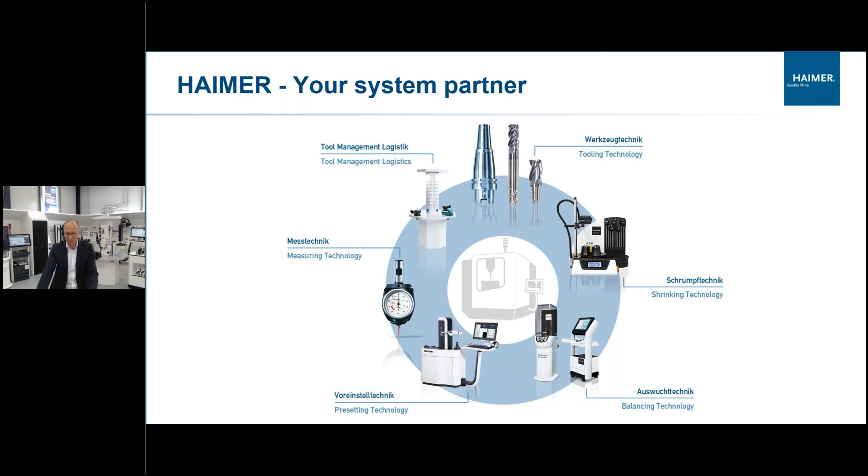So that's the Haimer program. Today I want to show you how productive machining can be realized with the help of the surrounding and the help of the Haimer products, to fulfill the highest productivity optimization in your production process.

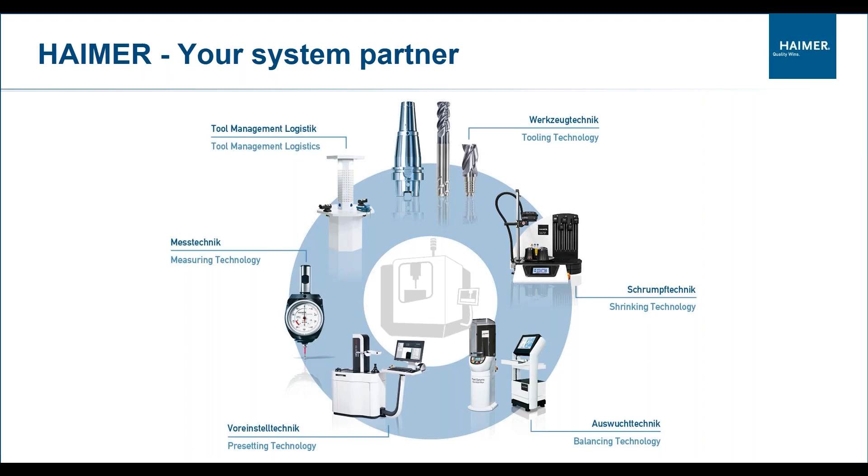Coming to the next slide, which shows why high quality tool holders are actually needed - what is the reason why we need high quality tool holders in the process of machining and cutting and making chips. We have a high quality and high precise machine tool with high quality and precise spindle and software, and then we have a very good cutting tool.

So we want to make chips. We want to be very precise with the part that we have to machine - that's the challenge we have to master. In the middle of this process we have a tool holder, and this tool holder is the interface, and it must reflect the quality and the accuracy of the machine tool and the cutting tool. So that's the challenge that we are facing.

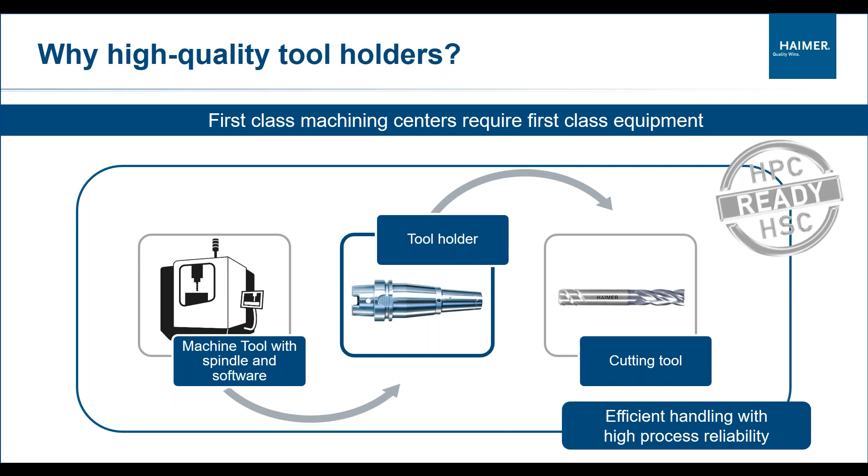We say first-class machining centers also require first-class equipment, which means also around the machine tool. For this reason, we say it's obligatory that you also have a high quality tool holder for the efficient process. But what does high quality tool holder mean?

First of all, the saving potential in manufacturing is enormous. But if you want to save on the tool holders or on the cutting tools, you save only 0.5% of the whole cost structure for your machining needs. We say if you really want to save money, then you save money on the machining time. You want to be more productive, more efficient, you want higher feeds and speeds. This is where you actually can make the money, and not by purchasing cheaper tool holding or cheaper tooling.

So it's about machining time, productivity on your machine. Use the time on your machine in a real productive manner. This is the message of this chart here.

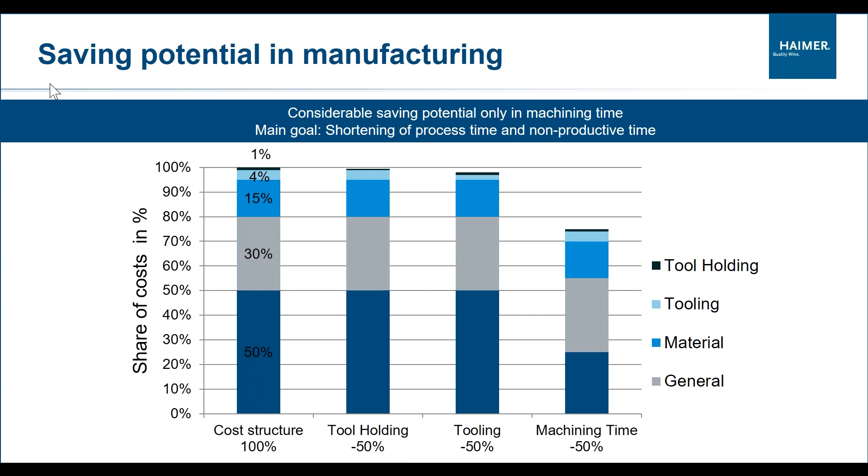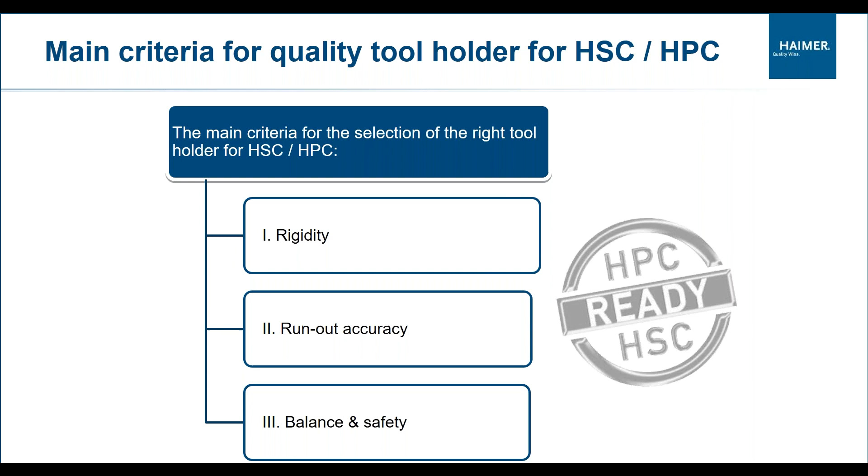Followed by the main criteria for a high quality tool holder, which means rigidity, runout accuracy, and balance and safety. In the following I come more and more to rigidity, which means the rigidity of the interface of the taper. Haimer grinds very precisely, especially there where the spindle takes the tool holder. We have fine ground parts and highest accuracy - less than 1 micron we are grinding - and this is what highest quality in machining needs looks like.

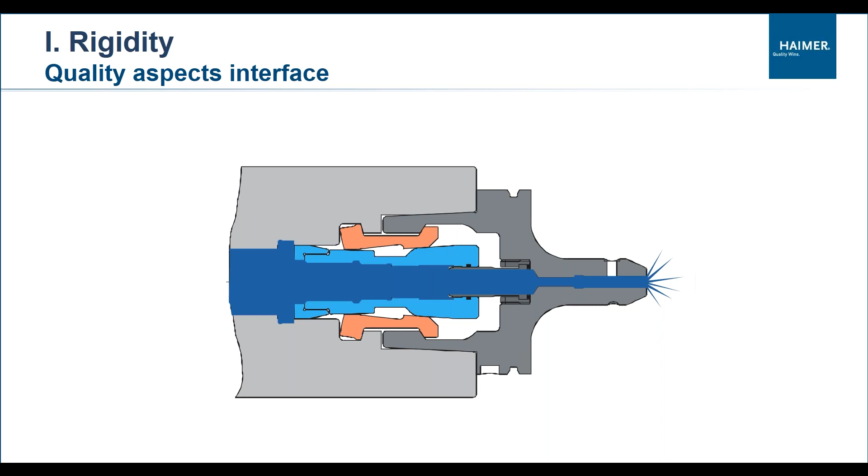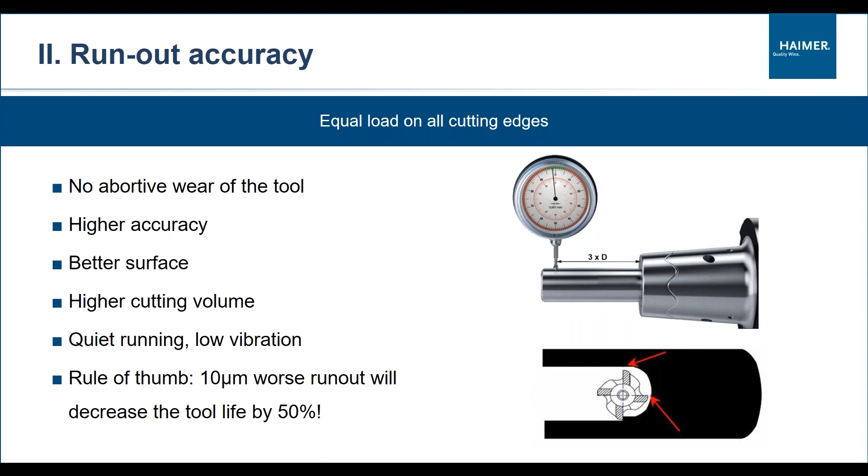So rigidity is one point, runout accuracy the second point. We want that you cut, of course, with all 4 cutting edges of your cutting tool, and not only with 2 cutting edges, which means higher runout, then you have higher cost for the cutting tools, and of course you will also have a workpiece which doesn't fulfill the quality aspects that you desire.

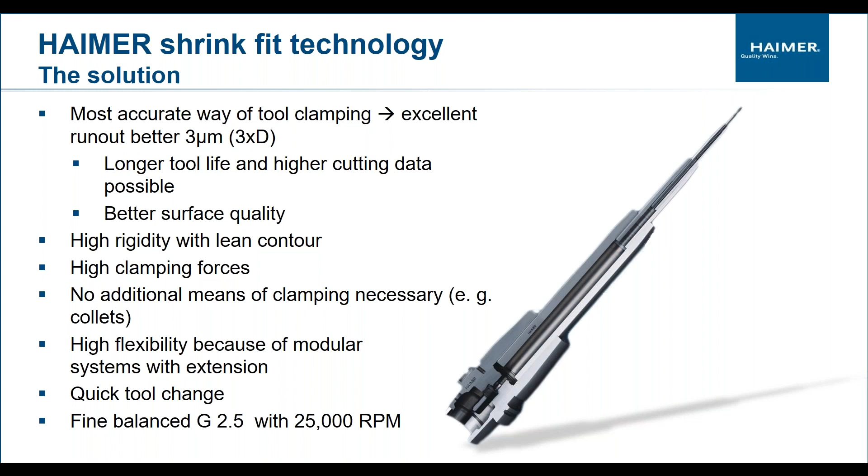Shrink fit technology is the solution to be very accurate and very flexible. Long tools can be realized. You can have shrink extensions to shrink them in, to reach deep inside, to get into cavities and around the part, especially for 5-axis machining or dynamic milling applications. This is a perfect system, and you are very flexible, with a high fine balanced G2.5, 25,000 RPM balancing quality with all the Haimer tool holders for shrinking technology. So that's really a super system.

Of course, for this system, you also need shrink machines. Haimer is the only one in the market that offers Industry 4.0 ready shrink machines that are tailor-made for the Haimer shrink holders. Of course, they also work with other shrink holders, but they're perfectly suitable for the Haimer shrink holders. The whole system guarantees highest run-out accuracy and long tool life for the tool holders, so you can shrink out and shrink in as long and as often as you like, just following the principle of this system.

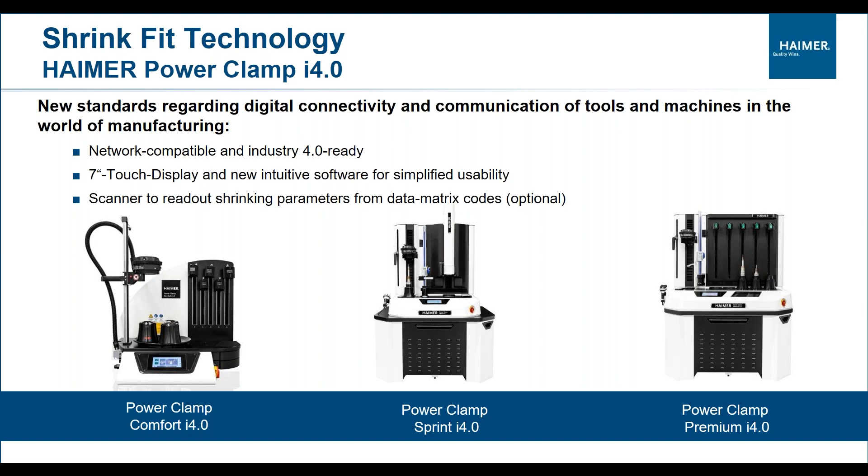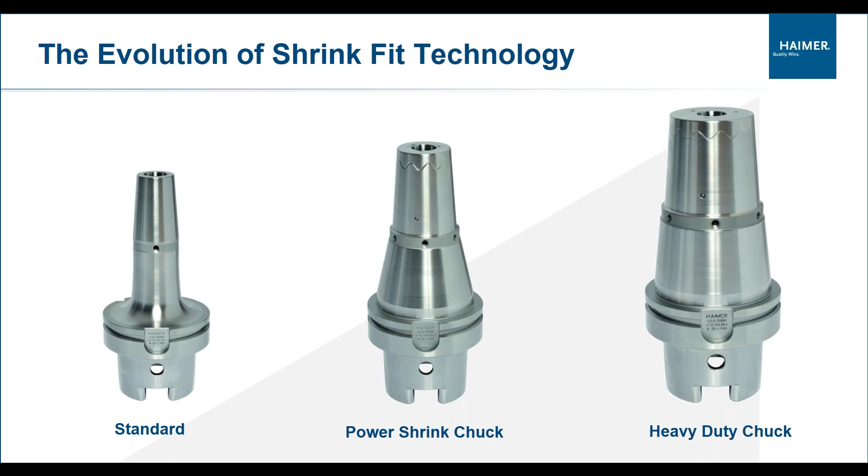Shrinking actually comes out of the die and mold area, but today it is also used in automotive and aerospace. So we have different geometries for shrinking holders: a standard holder, power holder, heavy duty holder, and power mini holder, different geometries to fulfill different applications and tasks in your machine tool.

The Haimer shrink holder is also a little bit different from the competition. We have a very short chamfer, which means a very long fit and very high clamping forces. We have a tight bore, so we have the best clamping forces. For this reason, cutting tools cannot get out of the Haimer holders. In case of really challenging applications, we also have our safe lock system.

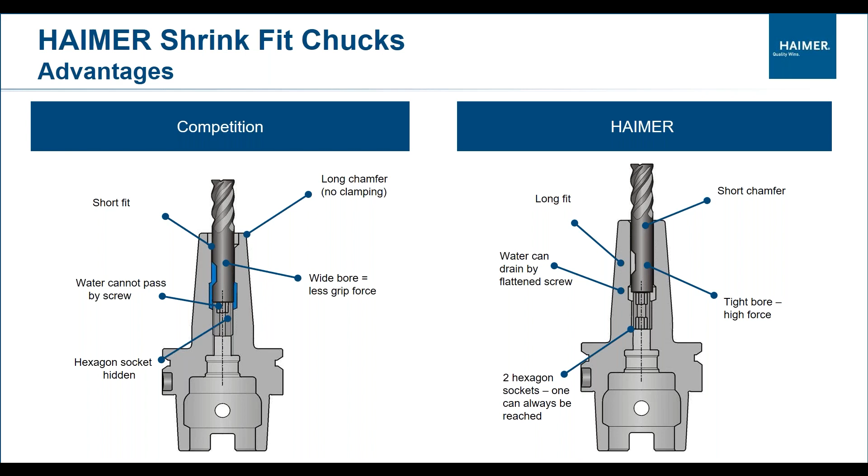Okay, then I have prepared the first demo for you. Let me see if I can just start it. It's a machining demo. I assume you can now see it. Let me see if I can just start it. Now it's starting, and I hope you can see the video now.

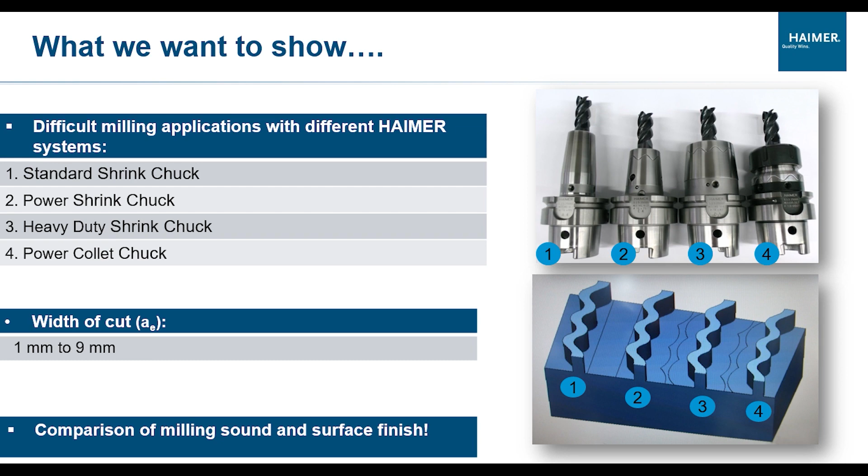One second, I'm sorry to interrupt. Can you see the video actually? Unfortunately not. Try to go to your screen drop-down list and see the video itself. So in sharing, is it now visible? It's loading. Can you see it now? Do you have it on your computer maybe, so we can try to play it? Is it now working? Unfortunately not. I'm sorry, okay, or what should we see? Give me a second, you should see a video actually. But what's the first? I see a test setup table. Is this from your slides or just a video? No, it's a test setup. Yeah, that's a video actually, so that's a test setup, so then you see it. Okay, so that's a test setup. Okay, it looks like the slides. So go on please. Yeah, it's a test setup.

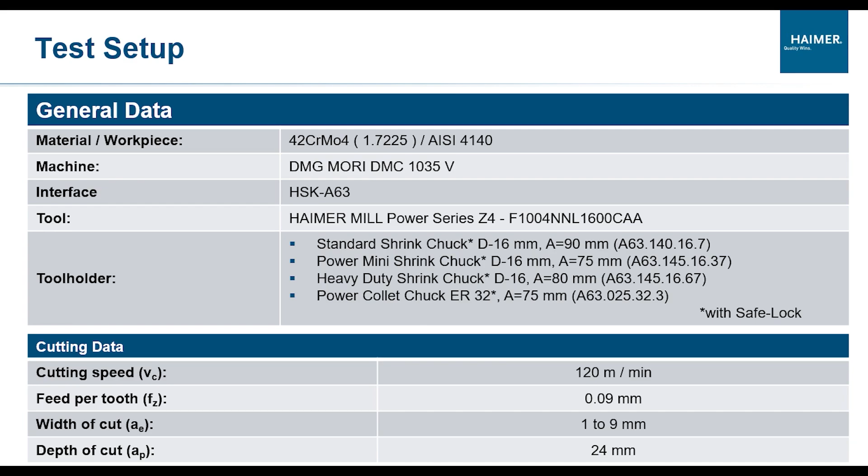Yes, and now you can see the machining. Please listen to the machining sound. So that's a standard shrink holder, and we want you to see and hear the sound of this machining process. Of course you would reduce feeds and speeds in this case. It's a standard shrink holder, a challenging application in 42CrMo4 material.

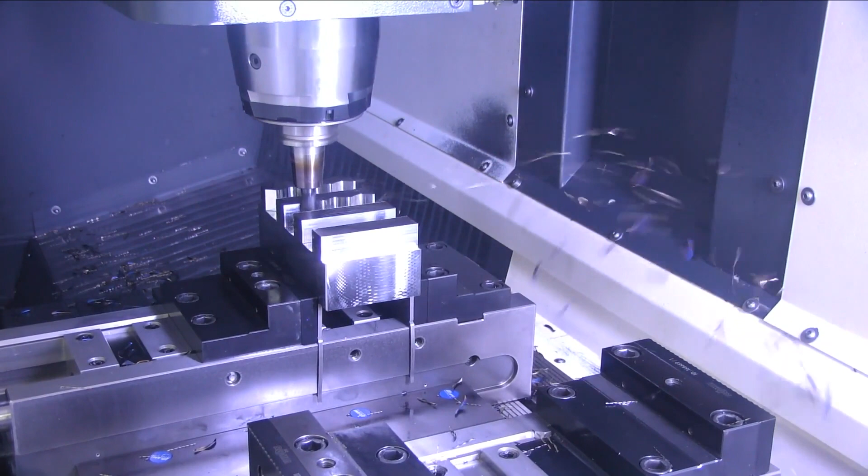And this was a standard holder. Now we are doing it with a power shrink holder, which is a little bit shorter and has a bit more outer geometry. Listen: a very smooth machining process, which means a stable process. You could maybe easily increase feeds and speeds for this. For this reason, it's a very stable machining process, just by the change of the tool holder — the cutting tool and everything else stays the same.

Then we have the Haimer heavy duty chuck, which is even more rigid. You can see it's a really stable shrinking holder, smooth cutting, smooth process, no noises, no vibrations, just a smooth cut.

So all of these are shrinking holders, but they fulfill different applications. Now we see a fourth one: it's a power collet holder, so it's a collet chuck — a stable system, very short, high quality, high run-out accuracy, also very stable. You hear the sound, it's also a very good sound, so no vibrations.

Okay, I hope you can see my screen again. Yes, we can see it. Perfect, and now we see the pictures and the results out of this test cut.

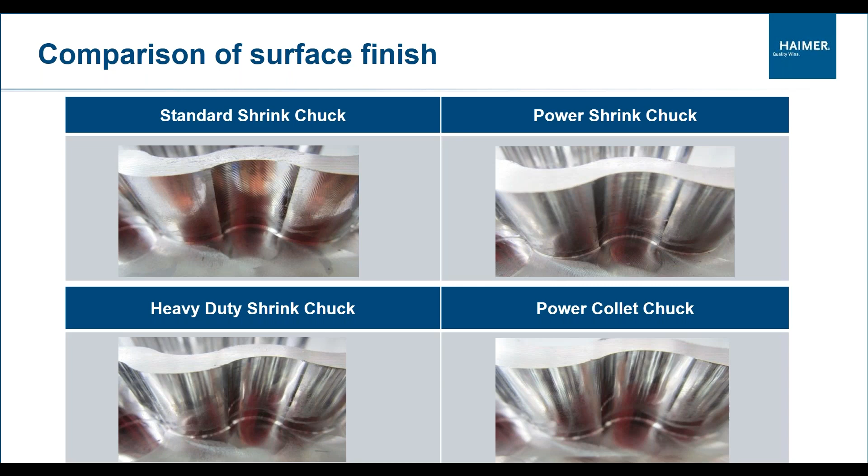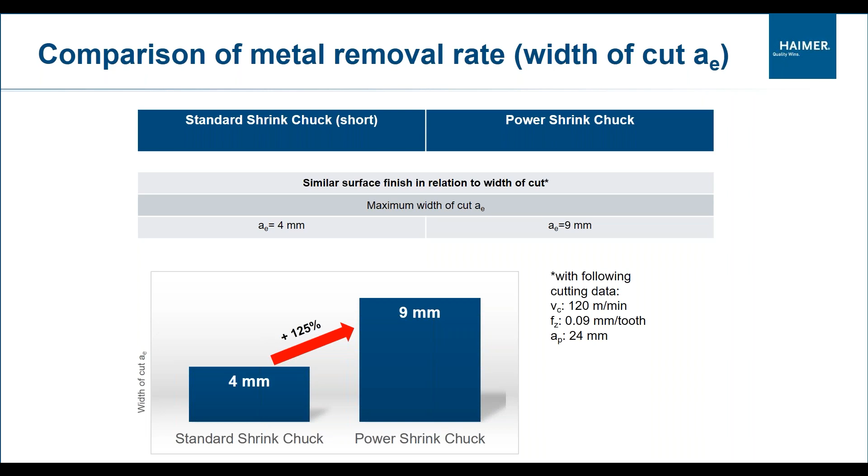You see the standard shrink chuck on the left side at the top, and then you see the surface finish is not as good as with the power shrink, heavy duty, or power collet chuck. You could hear it, there were vibrations. We just changed the tool holder, nothing else in the whole system, and we got a very different cutting and machining process just by changing the tool holder. So it's very easy. What we could realize in this case is higher productivity, because with a power holder you can have a much higher AE, meaning depth of cut or width of cut — we can go 9 millimeters wide instead of only 4, which is a 125% increase in productivity, which is actually the goal. We want to be productive.

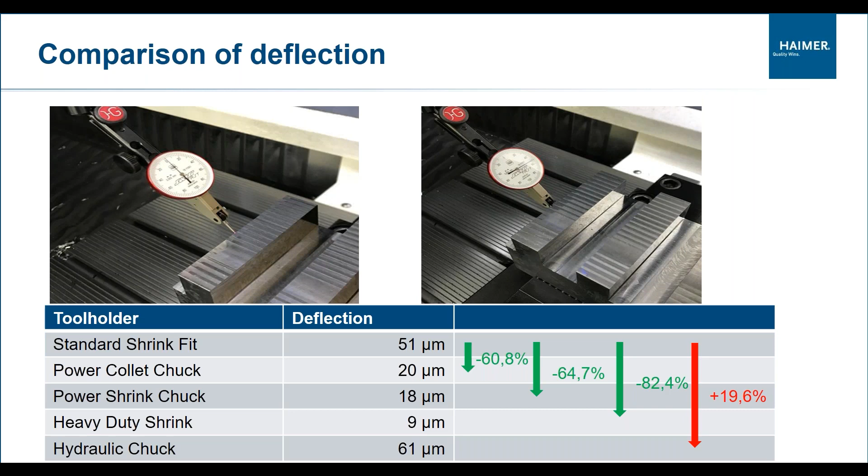We want to make chips. We want to earn money on the machine tool. And of course, the weaker the system, the more deflection we have. In this case, the standard shrink holder had more deflection than the heavy duty one. Also with a hydraulic chuck, which we didn't show now in the picture or movie, we checked it too, and we have even more deflection. So it's not a stable system, not as rigid as a shrink holder. That's just to show you different versions and geometries for shrinking holders.

Another very important fact is balance. What is balance? Unbalance is expensive even if you don't see it. Sometimes you have vibrations but don't know why, and it's just because your tooling package or cutting tool, including the tool holder, is not balanced, and it creates centrifugal forces at higher RPM. To be more productive, you can use balancing as a system to get more productivity out of your machine tool, to increase your RPM, or your feeds and speeds. With unbalanced tools you have reduction of tool life, reduction of spindle lifetime, and the whole process suffers if you have a weak part, and that weak part would be the cutting tool because it's not balanced.

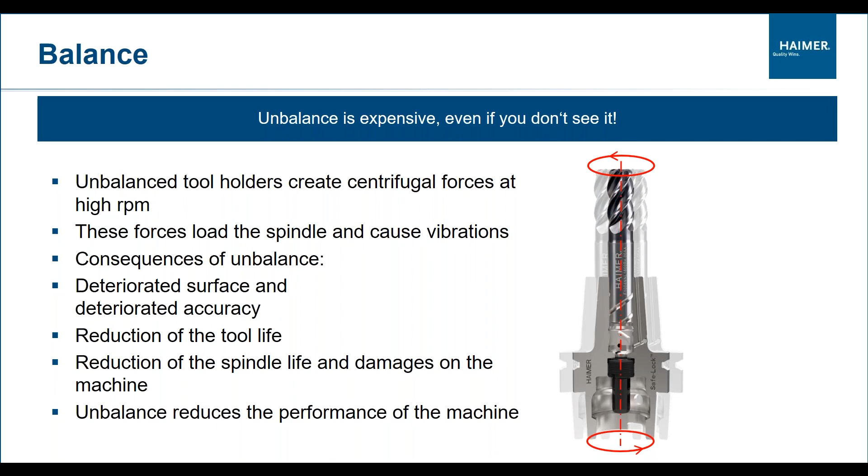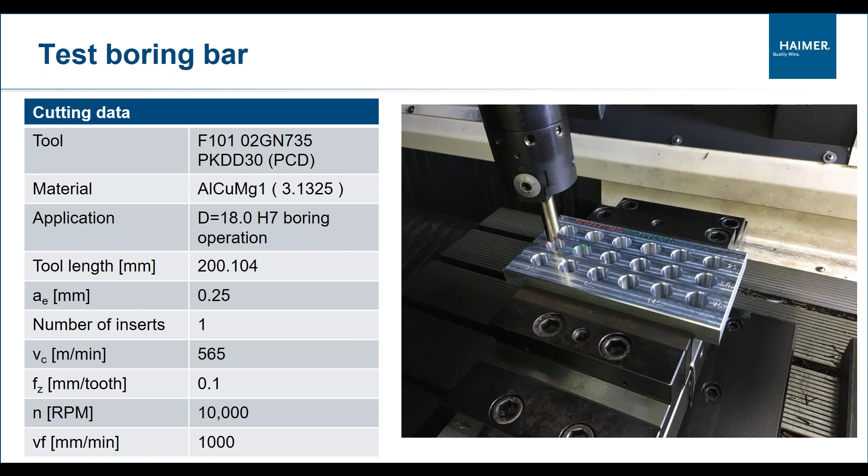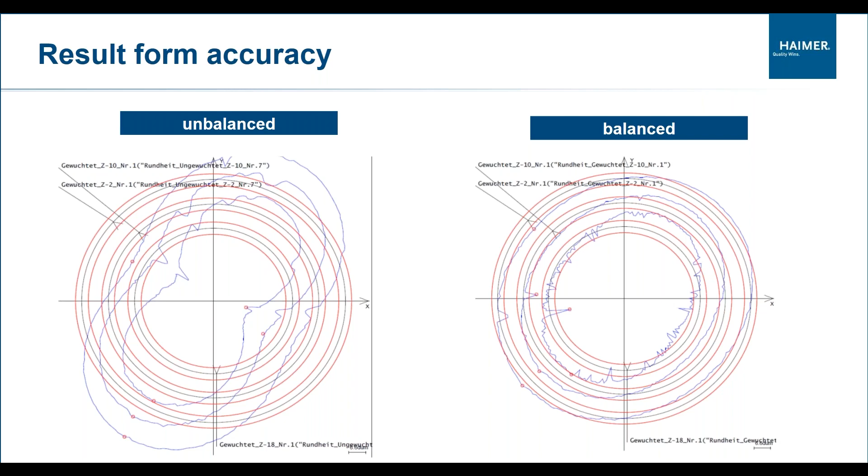How do you do the balancing process? It's done with a Haimer tool dynamic. Haimer tool dynamic means the balancing machines from Haimer, starting with a small one up to a bigger one, to semi-automatic balancing systems. Very easy system - it tells you exactly how to reduce and how to compensate the unbalance.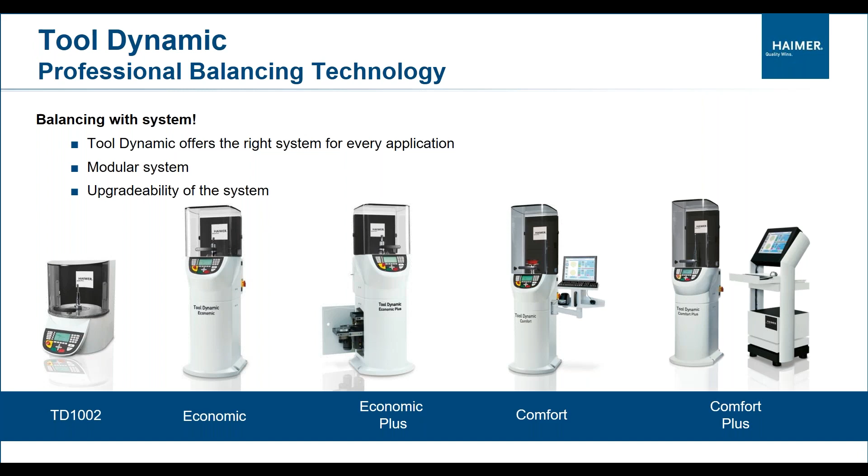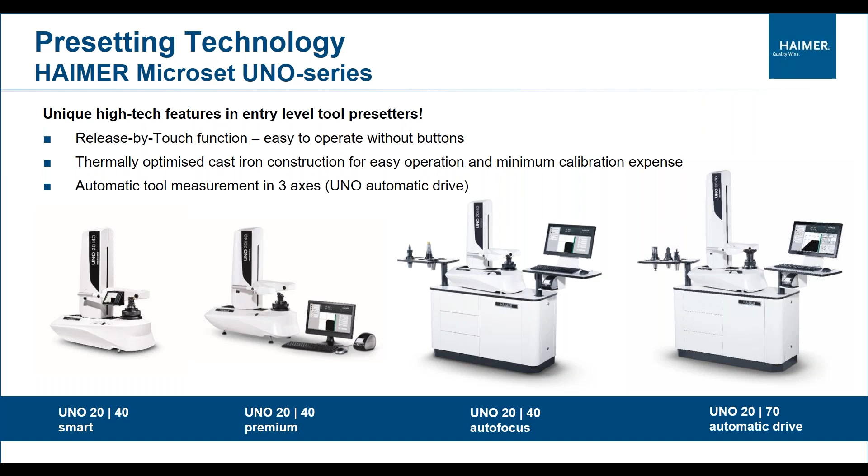So what is so special about these Haimer presetters? It's the cast iron construction, which means we don't have to calibrate the complete system, and also the adapters, again and again from time to time. So it's really, really efficient, and you can save time on your machine tool if you don't preset the cutting tools on the machine tool, but externally. Don't make the machine tool itself the most expensive presetter in the world - just use a tool presetter. That's so simple.

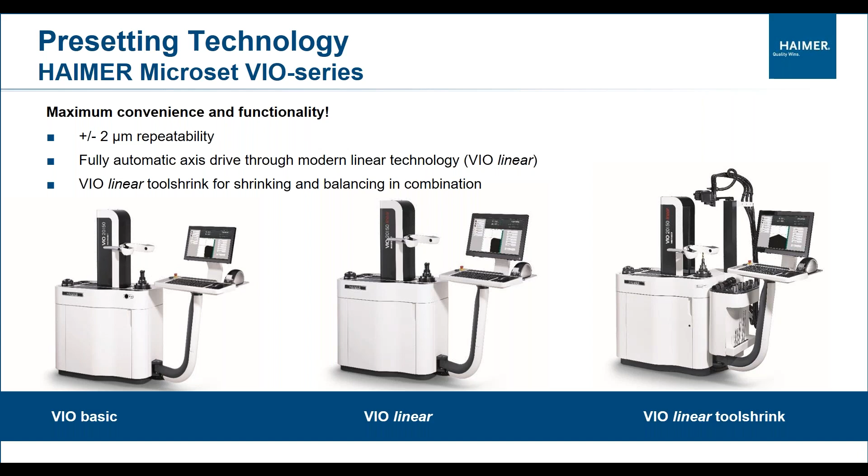Yeah, that's the end of my presentation. I could show you how easy it is to gain more productivity around the machine tool - by shrinking, by balancing, by presetting. Simple systems, simple changes for you guys. Now I would ask you to ask your questions, and to tell me what came up. Thank you for your attention, and I will be there for you for the next 10 minutes now.